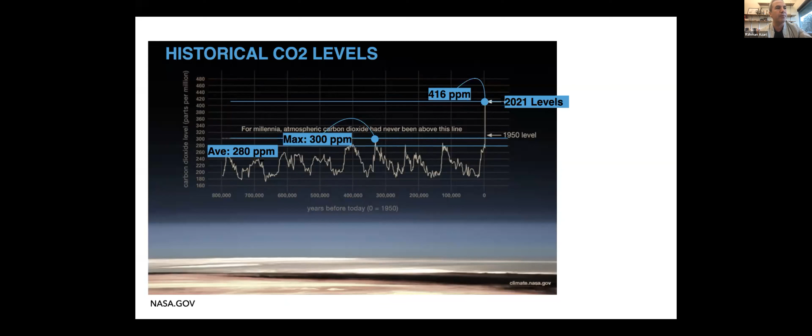I checked the NASA website last night, and their latest recording of CO2 levels is for October 2022, and that is 419 parts per million. In other words, in less than a year, 3 ppm has been added to the concentration of CO2 in the atmosphere.

Speaking about percentages, in this presentation I'm going to present an overview of energy use and greenhouse gas emission contributions in the United States and its national drivers, and some of the policies to limit global warming below 1.5 degrees Celsius. The United States is the second largest emitter of GHG emissions, with a share of 12.67% of global emissions.

The most recent data shows that the country's annual energy use is 98 quadrillion BTU, which is about 103 exajoules. 39% of total energy use in the US goes to building operation, with at least 6% going into building material manufacturing and construction. These figures include electricity use and its loss in the system.

The United States also emitted about 5.98 billion metric tons of equivalent CO2 emissions in 2021, 21% of which is caused by direct and indirect emissions related to building operation, and at least 6% of which is caused by building material manufacturing, particularly cement, steel, and aluminum.

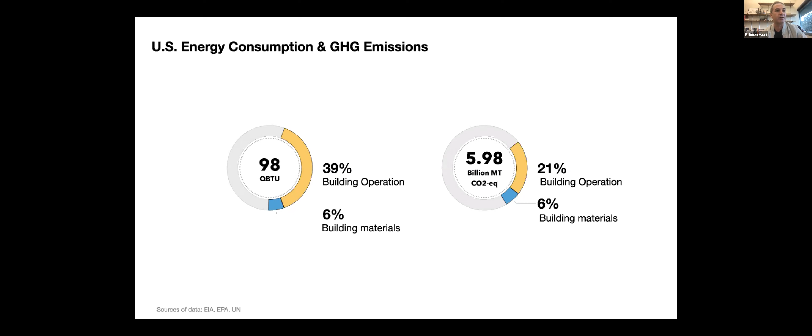In the building sector, residential is the largest consumer of energy with a share of 21%. 72% of residential energy is consumed for space heating and cooling, followed by 22% of plug loads. In the commercial sector, the share is 18% of total energy use in the US, and the energy is primarily used for heating and cooling at 40%, followed by 42% plug loads.

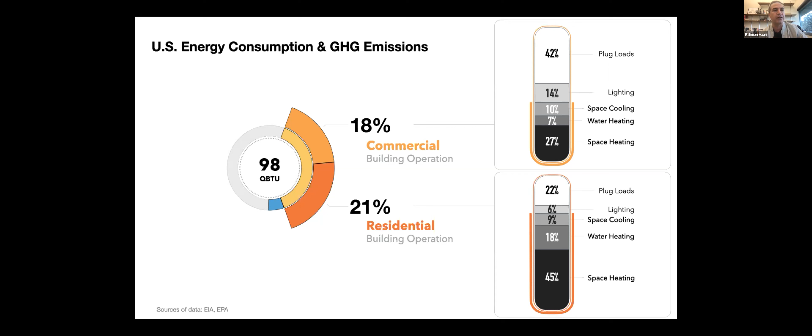The energy consumption of the residential sector is directly driven by 3 factors, including population, size of housing units, particularly floor space, and household size.

US population has increased by 12% since 2005, and 2005 was the year that we had the largest GHG emissions. Also, as more Americans tend to live alone, the household size is shrinking, leading to a 2.33 decrease in 2021, yet the average size of new housing units has increased by 1.89% compared to 2005.

Despite directions of these trends, as well as increase in the floor space of both residential and commercial floor space in the United States, both energy use and GHG emissions of the building sector have fallen in 2021 as compared with 2005, with a 3% decline in energy consumption of the residential sector and more than 2% reduction in the commercial sector. While part of this trend is certainly because of the effects of the pandemic, energy efficiency improvements, electrification, as well as decarbonization of the electricity sector have contributed to this decline.

Acknowledging the need to limit global warming to 1.5 degrees Celsius, the United States government has defined 3 targets in its effort to control its GHG emissions, including 26 to 28% reduction of emissions in 2025, 50 to 52% reduction in 2030, and achieving net zero emissions status in 2050.

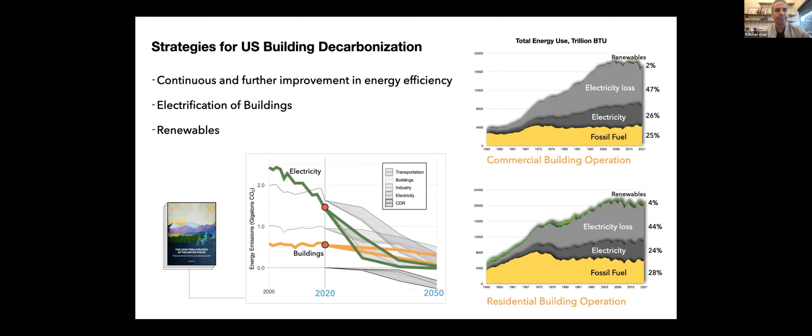The new long-term strategies of the US government also focus on reducing embodied carbon emissions. Currently, at the global scale, embodied carbon represents 28% of building emissions annually, as compared with a 72% share of direct and indirect building operational emissions. But it is estimated that building construction globally between now and 2050 would account for about 50% of building emissions. This shows the urgency to focus on embodied carbon.

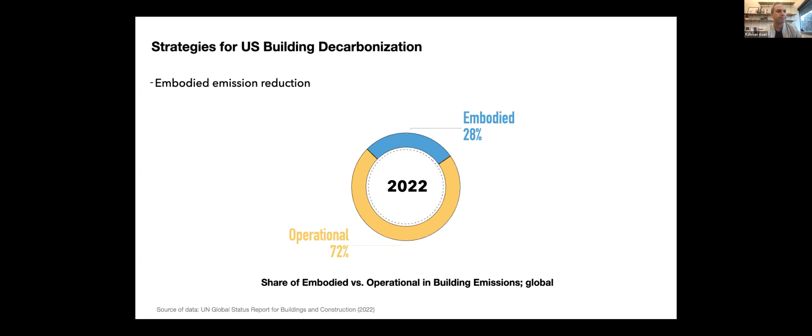The embodied carbon strategies in the United States are pursued by regulations and policies at federal, state, and local levels. At the federal level, the Federal Sustainability Plan and President Biden's Executive Order 14057 sets the target for all federal buildings to reach net zero emission status by 2045, with 40% reduction of emissions by 2030. The government also defines new standards for low embodied carbon concrete and requires all federal contractors to disclose environmental product declarations of their products and embodied carbon for materials used in new building projects.

At the state level, currently 8 states have passed laws or are in the process of establishing procurement policies that would require environmental product declarations and limiting of embodied carbon for major construction materials, in particular concrete, glass, and steel. At the local level, more than 25 cities and authorities in the United States have climate action plans with embodied carbon implications. Embodied carbon reporting and improvement are also actively pursued through green building rating systems such as LEED and Living Building Challenge.

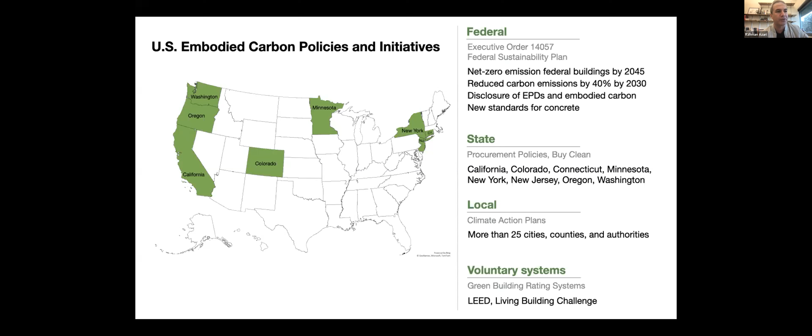An important next step perhaps would be to include mandatory embodied carbon targets and thresholds in the building codes for United States buildings.

The size and trends of the building construction industry in the United States shows both the urgency and opportunities for change. To better understand these opportunities, we have used the trends of population growth and variations in the sizes of commercial and residential stock to provide a simple estimation of new building construction by 2050 in the United States.

The existing building stock in the United States includes 24.6 billion square meters of residential floor space, 9.2 billion square meters of commercial, and 1 billion square meter of industrial building sector. We estimated that a total of 9.7 billion square meters of new building construction will be added to the existing stock by 2050. That is more than 12 times the area covered by New York City.

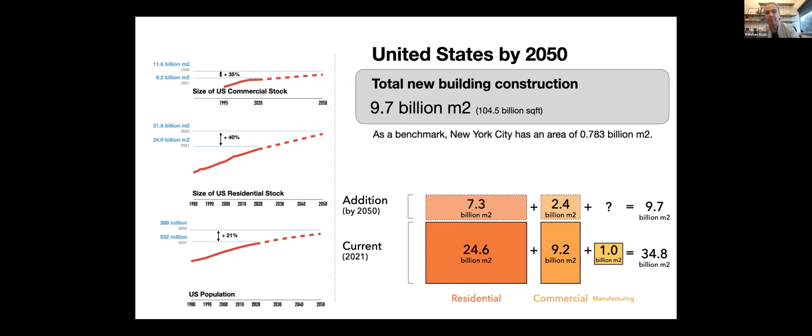A knowledge gap in the field of embodied carbon is a lack of tools to help policymakers understand the magnitude of embodied carbon implications of building construction at the scales of urban, regional, and national levels.

In a project entitled URBEC, Urban Embodied Carbon, we aim to integrate bottom-up and top-down modeling approaches to create a tool that helps understand how current and future construction practices and embodied carbon policies would affect the United States goals to achieve net zero emission status by 2050.

In that direction, we are developing frameworks and models to quantify, assess, and predict embodied carbon at regional and national levels under different scenarios of growth, densification, and decarbonization policies.

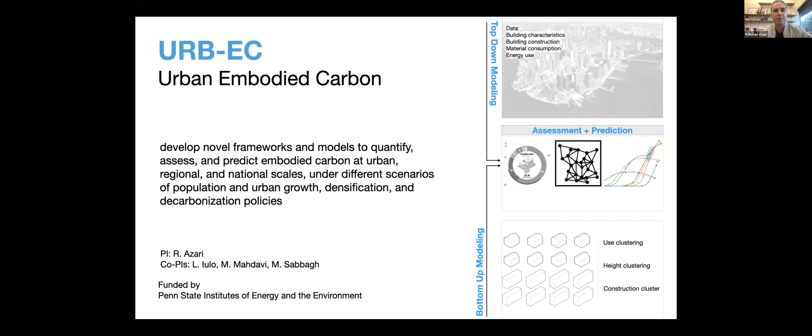In the first phase of this project, we focus on estimation of embodied carbon of residential building construction at the national scale by 2050. We used clustering analysis and identified the share of different archetypes of residential buildings in the US construction industry based on the type of building, structural materials used, and the main cladding materials.

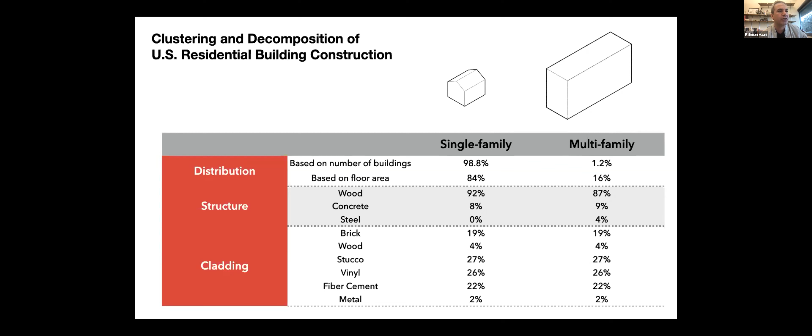As an example, the existing data shows us that new single-family housing in the United States has a 98.8% share in the residential construction market based on the number of buildings, and a share of 84% based on the floor area. Wood framing represents 92% of single-family housing construction, and concrete framing represents 8%.

We used the results to create 30 combinations of building design that would represent the residential construction in the US and determined the share of each combination in the total market. For example, the share of single-family housing units with wood framing and brick cladding was determined to be 14.6% of the entire new housing construction market in the United States.

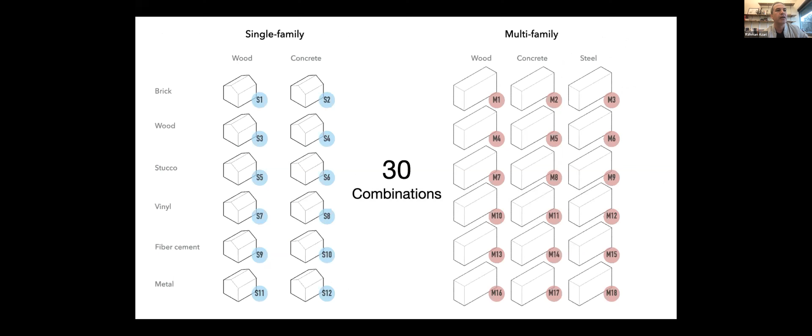In the next stage, we used drawings and bills of materials for two actual projects to create BOM for 30 combinations and used Athena Impact Estimator. This is a tool used primarily for the North American construction market to model the embodied carbon and life cycle environmental impacts of these 30 combinations.

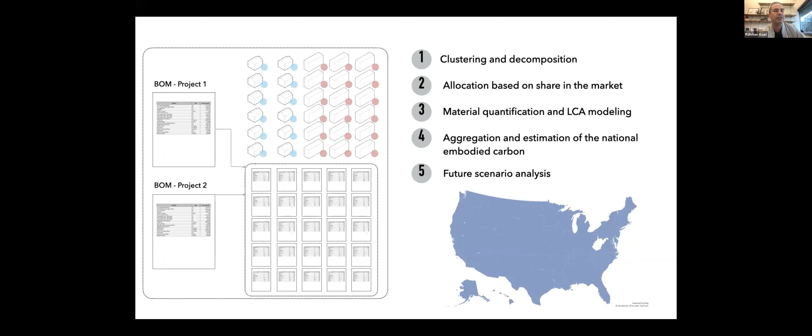We then aggregated the results to estimate the embodied carbon of the new buildings to be built by 2050, based on the projected growth in population and the projected growth in residential stock. Through this research, we were able to develop a framework to estimate the embodied carbon and life cycle environmental impacts of the building construction industry at the macro level of a country.

The results of our analysis showed that if we continue with the current growth of the housing stock, basically 2.7 billion square meters of housing is added every year to the US construction market. With the current growth that has been going on for the past decades, probably we can't achieve the new targets of net zero emission status by 2050.

The contribution of our work is primarily a framework to estimate the embodied carbon at larger scales beyond buildings. The advantage of this method is also that it isolates the effects of different archetypes of building construction on GHG emissions of the construction industry based on type and share in the market. The results also help understand the effects of embodied carbon policies on controlling US GHG emissions.

In the next step of our research, we are accounting for the trade-offs between operational and embodied carbon. We are adjusting the model for regional sensitivity. We are trying to provide further clustering in order to classify buildings based on more parameters, but of course the availability of data is a challenge for us. We are trying to adjust this model to also work for commercial buildings of different types to be included.

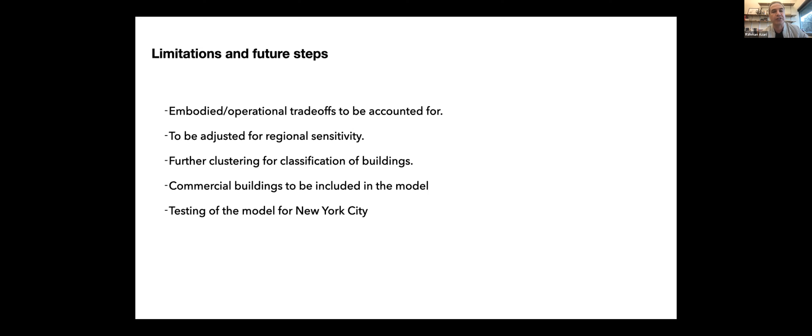So that concludes my presentation, and I would be happy to answer any questions that you might have.

Could I ask if there are any questions? I can't see any in the Q&A. Sorry, Ming, you have one.

You say, can you talk a little more about what rates, attributes and parameters you use to estimate the building stock growth till 2050? Do all states and jurisdictions have the same growth rate? Are those all new construction or also major renovations?

So we used the American Housing Survey data as well as the US Census Bureau data, which shows the steady growth, pretty much in the past few decades. There has been a steady growth of the residential housing market. There is some research, a famous paper published that shows 120 years of the housing market and how it has changed in the United States. So we used some of the assumptions based on that article as well, and use that to project the growth by 2050, assuming basically a linear growth by 2050.

Brilliant, thank you very much.

I can't see any other questions in the Q&A, but I have a number myself, Rahman, which I won't attack you with just now. But I was particularly interested to see the high percentage of single family buildings in your residential buildings, and that's obviously very different to most of Europe. I wonder if your modelling suggests that providing more multi-family buildings would be a lower embodied carbon solution.

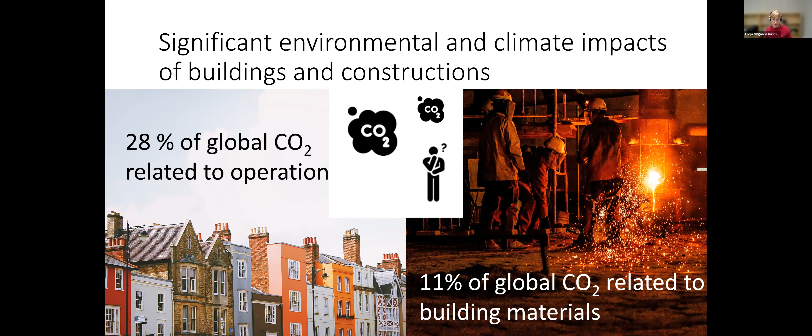Now this has been on the mind for policymakers in the Nordic regions for a while now, and recently they have taken it up a notch by really having this whole focus moving from a voluntary exercise by the industry stakeholders to a mandatory exercise. Because in the Nordic region there's been several green building certification schemes in use, and the industry has gradually moved into using these sustainability assessment schemes as a way of promoting their buildings and building up competencies within the area.

But the authorities in the Nordic regions have also taken it up a notch by moving from the operational perspective to including embodied emissions and also whole life carbon emissions. So it's not just focused on the emissions associated with the operational, but also the embodied. And that's also a step for the industry, of course.

Some of the external drivers for this development that we've had here is partly because of the industry gaining more and more experience with it and having input from a growing research field within the area.

It's also the national or regional regulation that we find from an EU perspective. So, sorry about the abbreviations here for non-Europeans, but we have the Energy Performance of Buildings Directive, which makes every country in Europe consider the energy, the operational energy use in buildings. And now it's also lining up for the inclusion of whole life carbon calculations, documentations, as within a few years that will be part of the EPBD.

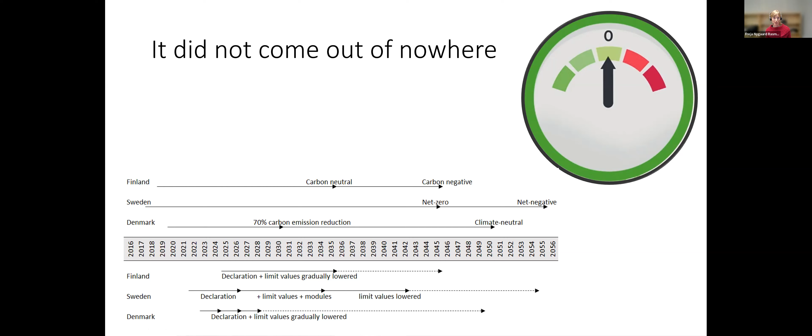Just as an example of what it is to be on the research side of it, from my Danish perspective, this is sort of the symbiosis we've had until recently in establishing life cycle assessment-based methods for evaluating buildings. We've also produced freely accessible tools that the building industry could use and obtain new knowledge. And then they would ask for product data that we could again feed into refining the method. And we would have such a nice cycle around, and we would publish some reports and some papers.

But then when the politicians came onto this and started putting it into the regulation, we were really excited from the research side, of course, but it also really fired up the demand for all the other things we have here in this circle of LCA life. So all of a sudden there was a growing demand for product data. There was an increasing pressure on the credibility of the method.

Can you prove that it is like that? What about the scenarios that you introduce? Like much more focus on the credibility, perhaps not surprisingly.

And then the introduction of limit values also really put pressure on the way that we handle the data and the method, because when we deal with limit values, in Denmark, they put limit values for 12 kilograms of CO2 equivalent per square meter per year.

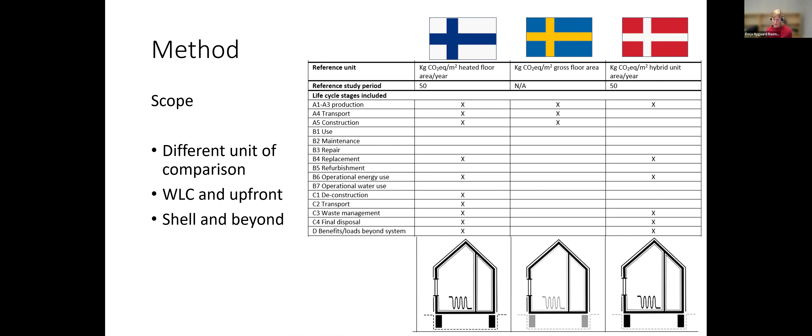But what all of these regulations have in common is that it's the plan they will develop further each time they are updated.

A few words about the data that has been used - and when I say data, I mean the carbon intensity of products that practitioners use to make the LCA of their buildings. We have the EN standard regulating documentation requirements for environmental product declarations for construction products, and based on these we have EPDs for specific products or producers, or from industry associations, giving an industry average of a product.

That's quite specific to whoever paid for the study or publishes it. But when we include it in the regulation in the Nordic countries, we've also had to provide some generic data that practitioners can go to as a representative product. If they don't know which specific product goes in the building, they should use the generic data. And of course it's a big question what the representative product should be - what is the typical market brick, for instance? So there's a lot of debate about that.

In all three countries, the regulation lets you either use the generic data, or if you know which type of product you have in the building, use the available EPD. The Finnish and Swedish authorities developed their own generic data, and the Danish building industry has been used to the German data, the Ökobaudat, for so long that it's been really hard to get out of that track.

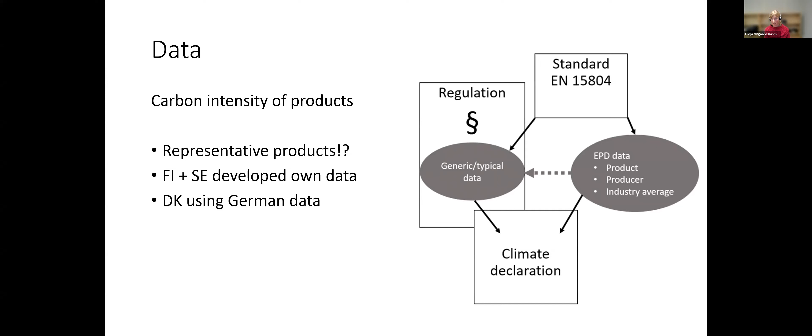It's static values for the whole life cycle of 50 years. So of course that means the Finnish and Danish frameworks are really not comparable in that sense either.

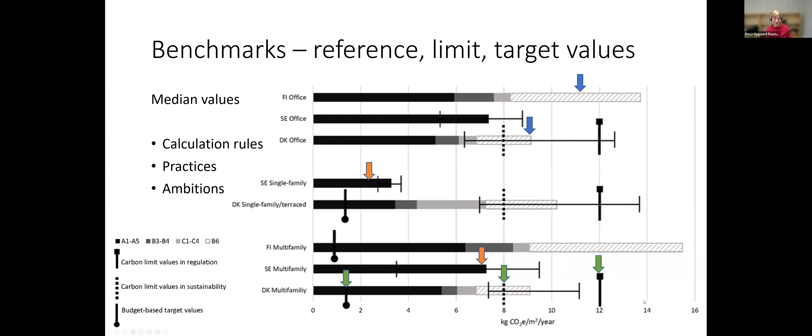A summary here: we have quite a lot of coordination going on within the Nordic countries, but still quite limited what they have actually achieved in harmonizing, all with good reasons. So no harm in that.

As I mentioned, there are some specific challenges when introducing the limit values. Everything has to be airtight for the number of years that this regulation is in place until it's updated. This configuration of the method, the data, and the benchmarks really should be airtight and cannot be readily compared with other countries' benchmarks, of course.

Then in all three countries there will be updates concerning method, concerning process, and also concerning benchmarks, because of course we would need to readjust the benchmark values as soon as we have a readjusted method.

And then as we saw, there is a big gap from the current limit values and onto some budget-based values where we take the access point in sort of allowance per user. So preferably, alongside this per square meter action that the regulatory framework is now driving, we should also have some demand side reductions on a personal level somehow.

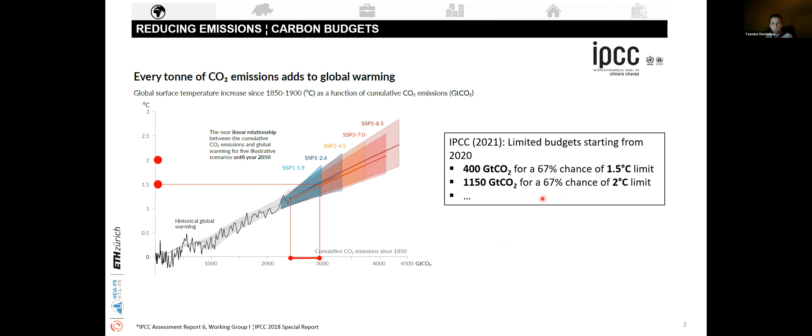The IPCC quantified these so-called global carbon budgets in their latest report with different levels of uncertainty. Here I've reported two: for 1.5 degrees or 2 degrees, with a 67% chance of achieving the goal. The question of the research I'm presenting today is how can the built environment understand and align to this global carbon budget?

To try to understand this problem, we used a top-down approach, answering intermediate questions to finally understand how and which strategies can help the built environment reduce emissions and contribute to limiting global warming.

First, national emissions. In this case I use Switzerland as an example, but I believe the methodology can be applied to any country. The emissions at national level are examined first to better understand the starting point and which dynamics a carbon budget and its distribution should account for.

Then the principles of allocating a global carbon budget to the national level are evaluated and discussed. Then we try to further allocate budgets to lower territorial scales, and we try to understand the limits and hypotheses behind doing such an allocation.

Then we took the Swiss carbon budget again and allocated it to sectors. There we tried to understand how future capabilities of each sector play a role in this carbon budget allocation. And we finally reached the built environment.

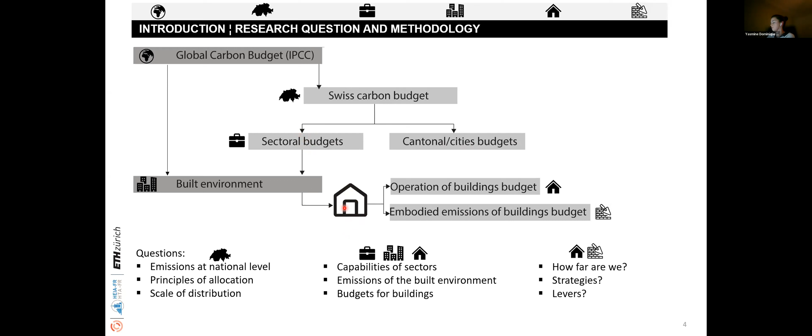Looking at national emissions, it's important to mention that emissions reported internationally, valid for any country, are based on the territorial concept, meaning only emissions occurring inside, in this case, Swiss borders, are accounted for. This is the so-called production-based accounting.

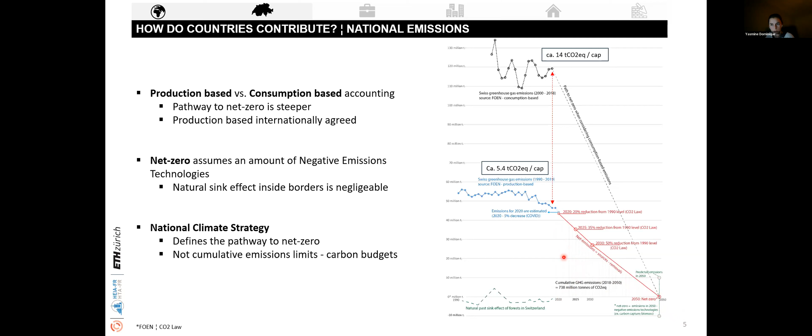Then how do we translate a global carbon budget to Switzerland? This, of course, raises difficult questions about how best to share these carbon budgets amongst nations in a way that respects the need of reducing emissions globally, but also addresses disparities amongst nations with respect especially to historical emissions, but also to their potential future emissions.

In the literature, this question is debated from different angles and opinions, but 4 main concepts are usually discussed: responsibility, capability, equality, and sovereignty. A fair distribution should include all of them, and a balance of environmental effectiveness, equity, national capacity, political feasibility, economic efficiency, and technical requirements should be met.

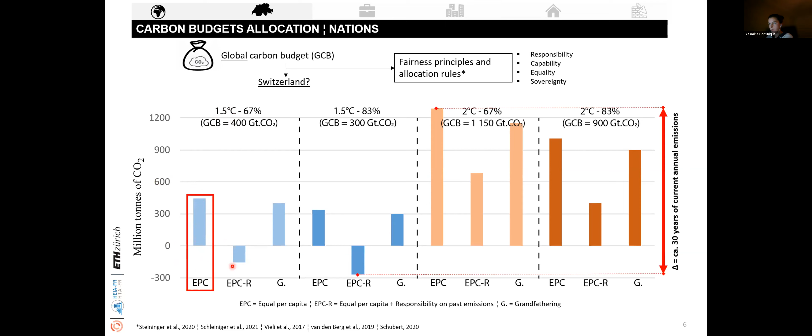The same concept of allocation can be further taken to lower territorial scales, applying the same allocation rules. This can be a useful tool for policymakers to set targets and understand viable strategies based on regional or communal differences and situations.

But this will also increase uncertainties about these limited budgets and questions about the viability of reducing the scale of analysis. First, the data is less available at lower scales. Second, the disparity between direct and indirect emissions—what is actually emitted inside the borders of the scale you're examining versus what is imported—becomes far more relevant if you lower the scale.

Last but not least, the concept of a carbon balance between sources and sinks is not really consistent if you lower the scale. For all these reasons, we concluded that reducing the scale to distribute this budget wasn't appropriate for the goal of this research, so we decided to stick to the national level.

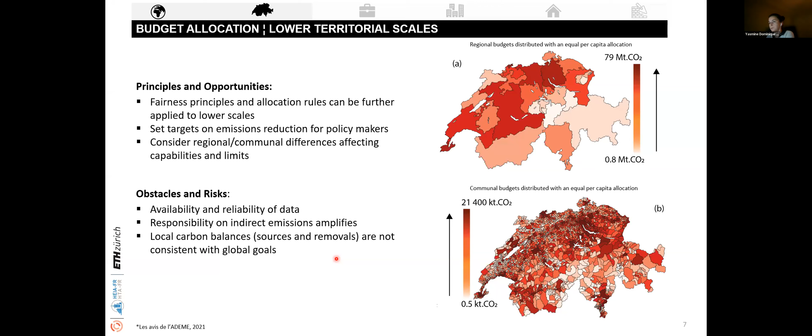For example, the sector called 'others,' from the official report of emissions in Switzerland, includes agriculture and waste management processes. It doesn't currently hold a high share of emissions, but is estimated that it will not be able to reduce emissions as fast, so it gets a higher percentage of the budget because we account for the fact that it will not reduce emissions as much.

The same happens for the industry sector, at a different level, which is also not expected to completely eradicate emissions in the time frame until 2050, and thus gets a higher percentage of the budget compared to the other sectors.

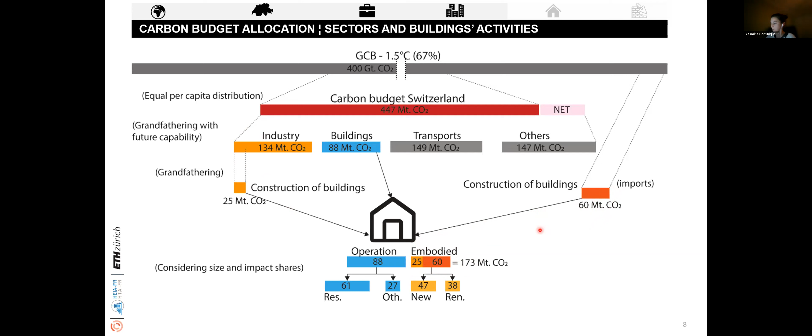So how far are we in achieving this budget? If we consider the building stock and practices to continue as today, we are currently at a 1% renovation rate, and we assume we will follow the current recommendations, which are not a norm in Switzerland but technical recommendations on operational and embodied emissions for buildings.

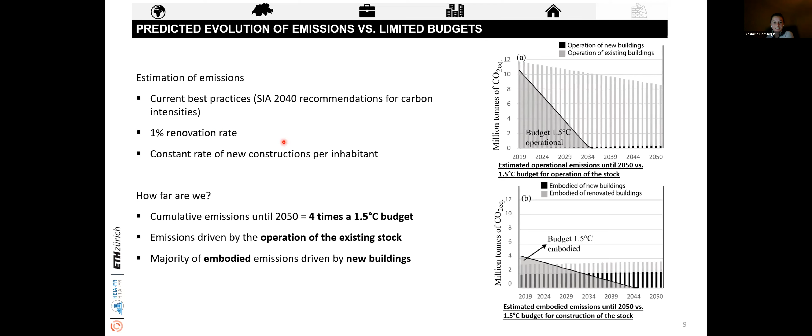Then how could we achieve our goal? That's the other question. I want to point out there is of course not one way of doing it, but the end result is very dependent on many factors affecting emissions in the built environment. Here I present one scenario where we assume the operation of the building stock will comply with its budget, reaching absolute zero linearly in 2035.

This translates to decarbonizing existing buildings at a rate of 6% per year from now on. Then embodied emissions will follow a decreasing pathway in line with the budget, resulting, if we look at emissions per square meter, in 90% less emissions per square meter in 2050.

If we consider that buildings designed today will probably be built in 5, 7, or even 10 years, or at least this is the case in Switzerland, we realize we should plan today's buildings with already 50% less emissions than the current average to meet the target by 2030 when the building is actually built.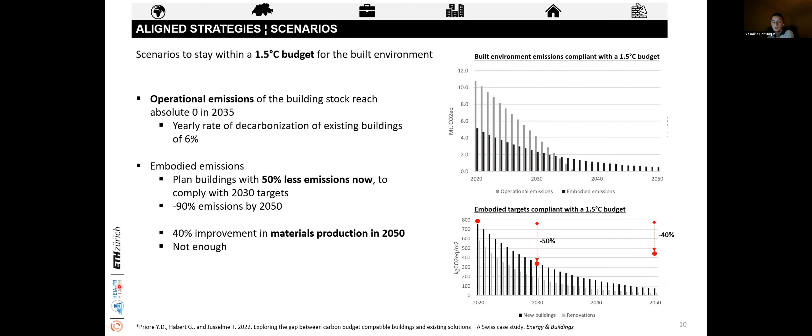As I said, there is no one way of meeting the budget. Here I want to point out that if we do not achieve the big assumption I made in the previous scenario of reaching zero in the operation of the building stock by 2035, the embodied emissions or budget will have to actually be negative, in a way compensating for the excess emissions that will be emitted.

To end on a colorful note, we created a little interactive parallel coordinate graph that we presented at a conference this year, where we put basically the main levers: the goal year of implementation, the operational targets, the embodied targets, and the renovation rate. With this tool, one can set or lock all the parameters and check how much emission will be spent till 2050, then compare it to a limited carbon budget.

Maybe I'll just accelerate, I think I'm running late. I just took two screenshots.

It's a very useful tool to understand the dynamics of changing these parameters at building stock level. One clear example is the two graphs here underneath.

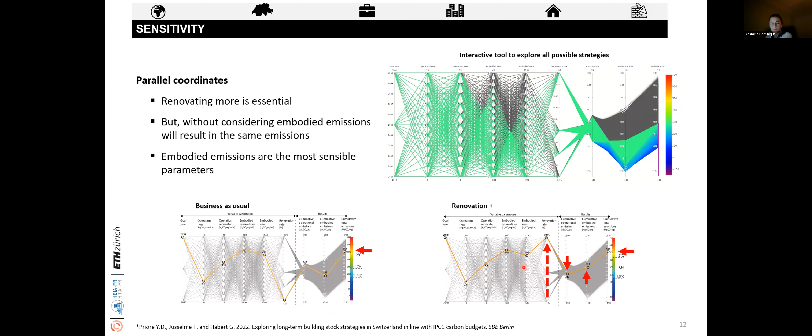By just changing the renovation rate and increasing it, but without looking at embodied emissions, we actually emit the same amount of cumulative emissions till 2050, giving a clear message that just renovating more without looking at embodied emissions will not solve the problem.

In conclusion, defining limited caps on emissions, such as carbon budgets, can be very useful to identify strategies for the whole building stock, but we have to remember the high variability that such budgets have in their background, depending on the allocation rules as well as the starting hypothesis.

In the scenarios I presented today, it is clear that if we don't change anything, we'll have no chance to meet a 1.5 degree budget. But also, given the very hard task to eradicate operational emissions, negative contributions from the building stock must or could be evaluated.

Finally, increasing renovation rate is indeed essential, but only if coupled with very low, or if not negative, embodied emissions of such renovations. Thank you, sorry, maybe I took a little bit more.

Yes, that was fine. We are running very slightly late, but it's pretty good. I thought that was really interesting.

Thank you so much. We have one question in the Q&A from an attendee who says, does the difference between production-based carbon and consumption-based carbon entail the consumption or lifestyle changes are necessary for actually reducing the carbon?

Do they suggest? I think it means that lifestyle changes are necessary. I think that's a good question. Very good question. Of course, I would say lifestyle would change both consumption and production-based emissions, actually.

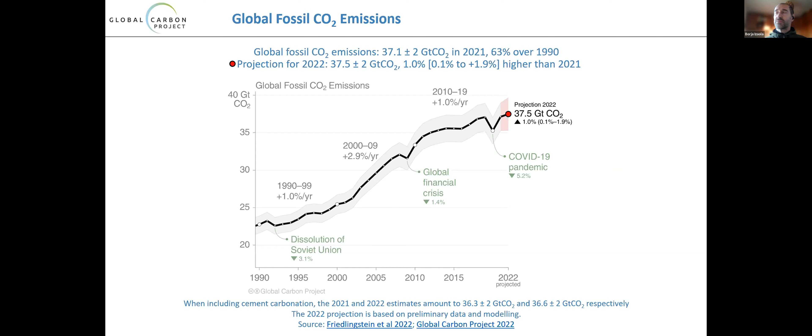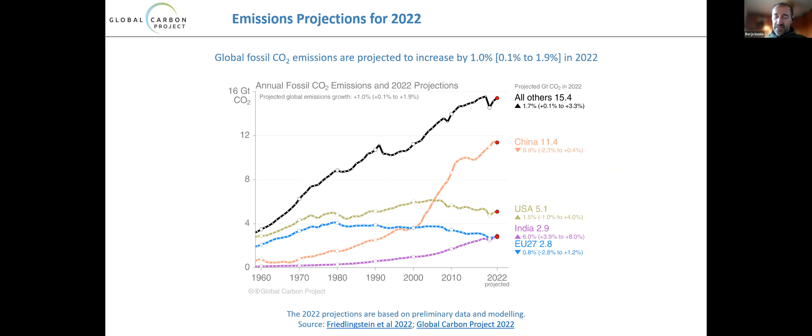Briefly, who's GBC, who are the Green Building Councils, is part of a global network of associations, including all actors of the building sector in each country.

Like in the Spanish case, well these are not the most updated figures, but anyway, about 400 associated members, more than 10 European funded projects, and many agreements with many entities. We run our own certification scheme with over 3 million square meters certified. We have a lot of events, and we also run a material platform where we suggest, recommend, and give data on several building materials.

We have run this project which helped roll out, get to know, and improve the Levels framework. The Levels framework is a voluntary framework. Freya mentioned that in her presentation before, about how to report, how to measure, how to understand sustainability of buildings. There are many countries in Europe, many understandings, not just among groups of countries that other countries consider very similar, like the Nordic countries.

Of course, for other Nordic people, there is a difference between Denmark, Finland, Norway, Sweden, and so on. It is brief, meaning that it comprises 16 indicators, but they are very powerful indicators. It's called levels because the approach is by level, by entry level. You can apply the levels framework with just your concept design, or you can already have the executive design, with all the details, and assess more profoundly. Or you might have already built the project and have real figures and be monitoring the performance of the building. You can also apply the levels framework at that very deep level.

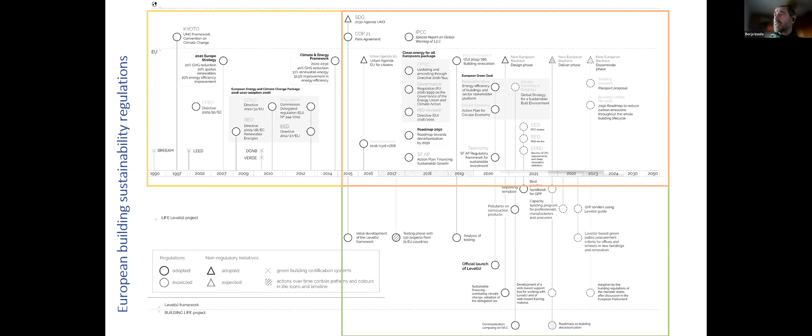I will go a bit more into detail in parts. First, until 2014, when basically the levels framework was thought to come to life, then until now, and then more in detail what this Life Levels project has been helping with in terms of advocacy and quality of data and methodology.

Definitely the Kyoto framework and the Paris Agreement and those big figures, those big targets, which have been increasing in Europe. Some years ago, we were supposed to achieve a reduction in global warming potential of 40%; after the Fit for 55 program or package, we have to reduce up to 55%.

We had the very relevant EPBD, Energy Performance of Buildings Directive, which has gone through several updates. In the very last update, it is currently at the Council of Europe to be finally approved. The suggestions were more ambitious than the directive will finally be, and for that, the energy ministers of the European countries thought it would not be realistic to apply some of the suggestions that had been proposed before. And there are many other directives and proposals on renewable energies and so on.

In 2014-2015, the levels framework started when circular economy principles and more profound debate internationally and at European level started, and when all lights went red concerning the climate emergency. So the idea was that Europe would be leading the world in terms of reducing carbon emissions and other climate actions. At times, wording goes faster than facts, but a few things have happened.

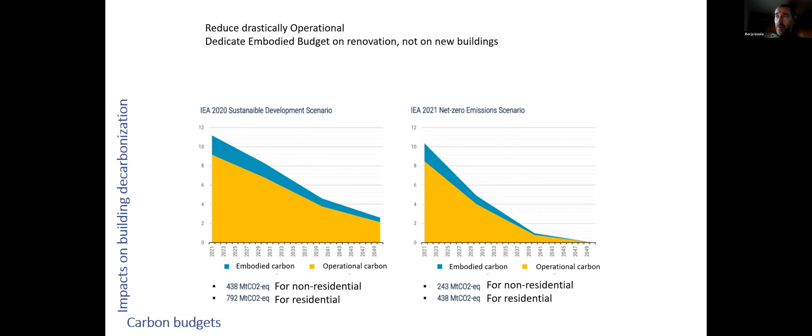We did something similar to the methodology Yasmin showed before. What we went into detail on is what needs to be done by the building sector—manufacturers, public administrations, designers, prescriptors, developers, regulations, everything—if we aim at achieving net zero, or as close as feasible.

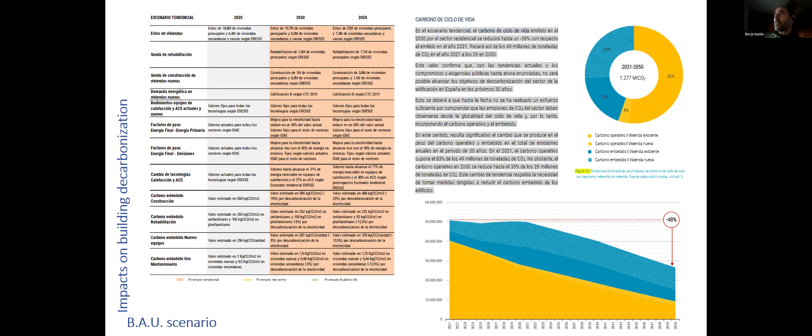So this is the business as usual scenario. We reduce, but we are still very far from net zero in 2050. We studied another scenario which develops from the best practices of the building sector, and it is more ambitious. It reduces more, 61%, but it's still very far from the expectations.

And this is the best practices scenario. Of course, best practices are in the hands of very few pioneers and actors who are very committed to decarbonization and environmental issues or sustainability.

Briefly, it intends to reduce embodied carbon to 25%. It also aims at increasing rehabilitation, basically doubling what is planned, and choosing materials with lower carbon. Without going into much detail, what you see in pink represents the best strategies in Spain, should they be implemented.

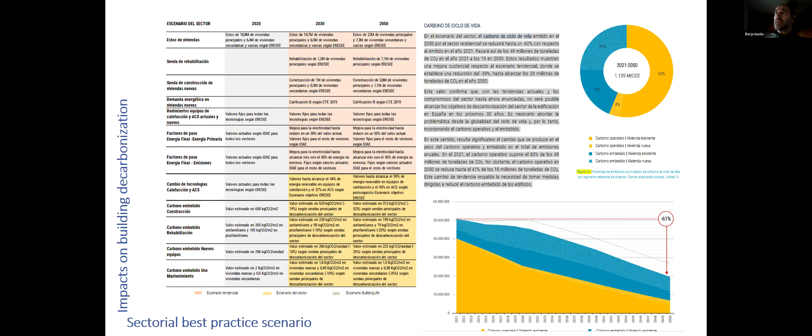What we did was propose a scenario to achieve, if not net zero, something very close—passed through a filter of what the actors thought feasible. We had many meetings and roundtables with over 230 different agencies and more than 900 people to check if they thought this was achievable. That's where we stopped.

If people do not see it as possible, then what are we talking about? They are not going to do it. Even so, this scenario means reducing the Spanish national plans for new buildings until 2050 to about half of current plans.

And increasing the rate of rehabilitation, basically multiplying by 10 times what is being refurbished nowadays. We aim at achieving the best energy certification for all buildings, rehabilitated and new, and improving the efficiency of all equipment by 67% and 98%—almost 100% concerning heating.

We also reduce embedded carbon in the main building materials to 30%, up to 75% reduction for pioneering cases. This means the footprint or benchmark for buildings in 2030 would be 186 kg of CO2 per square meter in single family houses, 74 in multifamily houses, and in 2050, 66 kg and 26 kg for multifamily buildings.

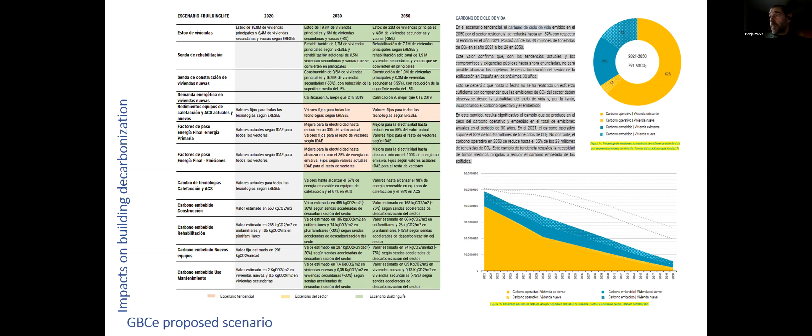So the ambition of this is so extreme, so disruptive, that although those attending our meetings—who are already the pioneers and most motivated—thought we are really touching what is considered impossible. Even then, we do not reach net zero.

And this is the comparison of all that. Basically, what we have done corresponds to a 2 degree warming scenario in 2050, not even talking about a 1.5 degree reduction.

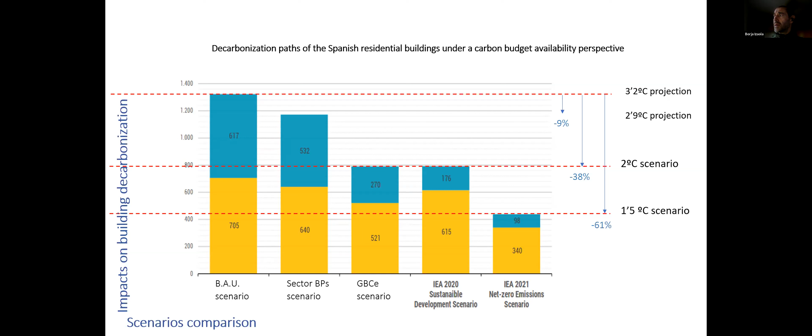Some conclusions to finish. Carbon advocacy is possible, even from small groups like the Green Building Councils—we are only about 20 people working here, so we are not a big company. Although we still represent 400 agents, which is less than one thousandth of the entities in the sector in Spain.

But policies help only if they are realistic and feasible. If not, they can actually block action. This happened before—I think it was Freya who mentioned the European taxonomy. In Spain, some of the targets of the taxonomy are just impossible. So how will we do it? How can we accomplish and respect regulations if they are not realistic?

What needs to be done? Europe is actively reducing its carbon footprint. Of course, there is no NATO war on our borders, there is no big oil in the world, and there is no migration from any southern country into Europe. So we are really doing well.

As Alice, you are laughing too much.

As you mentioned before, independent, transparent and credible data and use of this data are needed to know, compare, and draw conclusions, and hopefully eventually become baselines and benchmarks included into policies that help accelerate these processes. The levels framework is proving useful to support this transition to sustainable and decarbonized buildings, and I do believe so. When I've given information on the levels framework, attending or responding to people asking for consultancy, it works. I think it works.

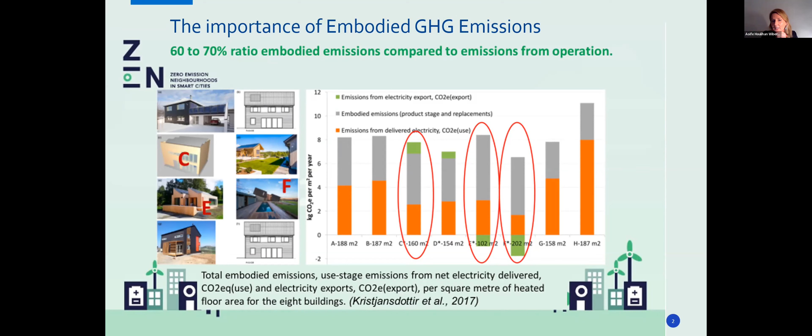What I'm presenting in the chapter is the results and output from Subtask 4 in Annex 57. This research was conducted almost 10 years ago, but it's still very relevant. The purpose of the case studies was to create a collection whereby we could collect case studies from around the world and extract and analyze the data from 80 of these case studies.

We had three main purposes. One was to produce a body of different international case study typologies, and make the building and LCA data easily accessible, transparent, and identifiable. So we published these results in a case study collection report.

Secondly, we wanted to use the international case studies to extract and analyze this data so we could do comparative analysis for specific methodological and design aspects, and we've published this in another ST4 report. Finally, we wanted to use these case studies to develop guidelines, which is the focus of this chapter, to reduce embodied emissions and increase knowledge transfer to the industry. This is published in a simplified guideline for designers.

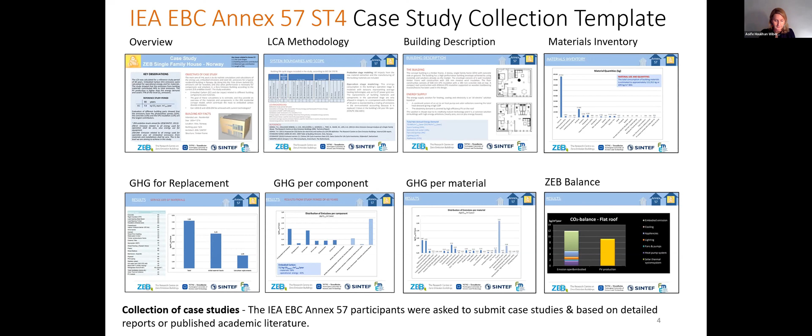From this case study information, we were able to develop a methodological process, developed according to EN 15978, to analyze the different themes. Secondly, and this is the focus of the chapter, we were able to identify the design and construction strategies to reduce embodied emissions.

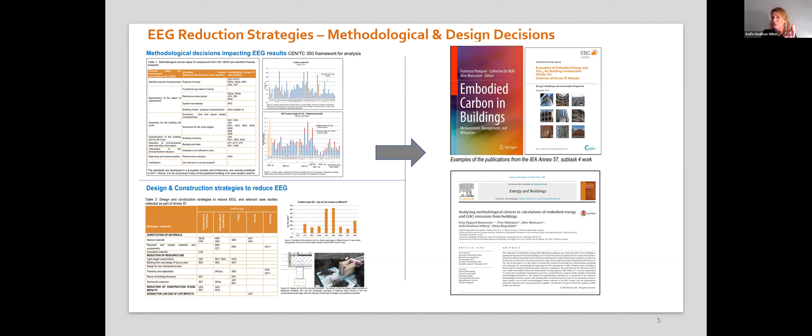So the findings from this research were then published in different formats. It was obviously in the technical reports from the annex, but also featured in Alice's book, which she edited, and other journal publications.

We were also very concerned with making the data accessible and making sure everything was transparent, so we developed a case study code for all the case studies we developed. That meant you could always trace back to the original case study and the original template. This helped us organize the information, develop the different themes, and ensure we had the transparency that was crucial to our research.

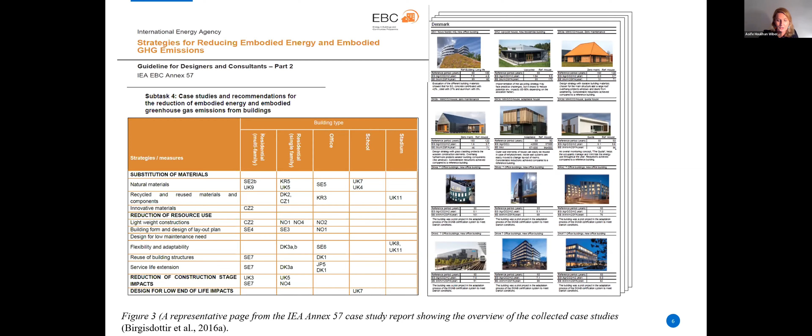A very big concern was that, as I said before, a lot of practitioners and architects aren't going to read these detailed technical reports. So how could we facilitate this transfer to industry, and how could we make the knowledge more accessible for designers in the early design phase?

One of the outputs from our annex was to develop a more visual approach in the form of a design guideline, aimed specifically at designers and consultants. We created very simple illustrations, as you can see on the right-hand side, and started to identify those key strategies that work to reduce emissions. As you can see at the bottom, we always included reference to the original case study.

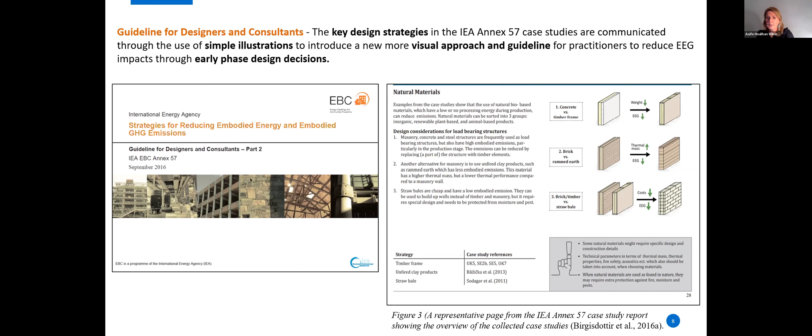I just need to move everybody over because I can't see.

This is a more detailed table where we started to identify different strategies that worked. From the case studies, we could see four strategies that really resulted in reduced emissions: firstly, substitution of materials; secondly, reduction of resource use; thirdly, reduction of construction stage impacts; and reduction of end-of-life impacts. In the subsequent slides I'll highlight a few of these in more detail.

For example, in terms of substituting materials for load-bearing structures, switching from concrete, steel, and masonry to timber reduced the weight of the load-bearing construction, and this also helped reduce the associated embodied emissions. As you can see on the left, we found some key results for switching from concrete, steel, and masonry to timber.

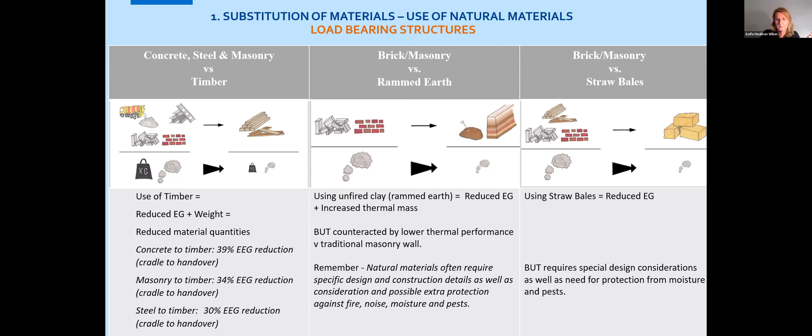For non-load bearing structures, we found that insulation was a very important material to look at because of the large parts of the thermal envelope made of insulation. This has quite a large potential for reducing emissions, particularly if you switch from mineral wool to wood wool or wood fiber insulation.

Another strategy we uncovered was that it's a good approach to switch from aluminium curtain walling to timber curtain walling, because the aluminium curtain walling is made of metal, which can have a shorter lifespan and high material processing. So switching to timber was a very good strategy.

This is something that was also used in the Norwegian ZEB pilots, which I can go on to later, where we used a Japanese technique to char and seal the outside of the wood cladding.

Finally, switching from cement to clay—replacing cement-based plasters with clay plaster—was a simple way to reduce emissions. Another benefit is that clay is locally sourced and it helped to balance humidity indoors. But again, you have to be aware that there may be impacts to consider in terms of durability and lifespan of the clay.

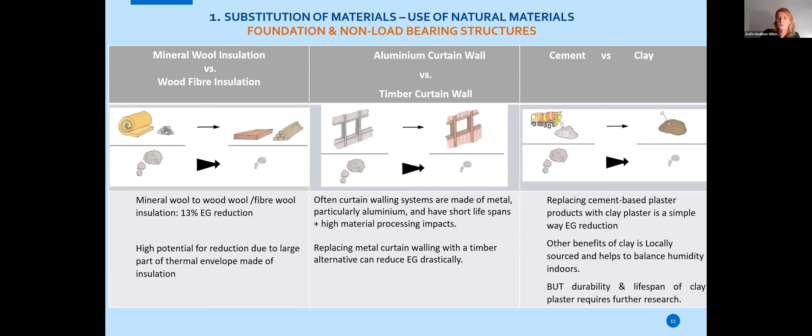In terms of reuse and recycling of materials, we identified three strategies. One was the recycling of brick, which obviously has a beneficial impact since you're not using new materials, so you're saving emissions. But we actually found that the reductions were quite negligible, at least in the cradle to gate stage, particularly because the materials often needed additional virgin materials to be added to give the material more strength.

You would need to pay attention to transport emissions and where the source of the recycled brick was coming from. In terms of upcycling waste, emissions reductions were quite considerable, but you had to pay attention to the quality of the waste materials, their structural integrity, and the availability of this material from recycling facilities.

When you come to recycling of concrete, again like brick, it's favorable because you're using less new materials. But you need to pay attention to the virgin materials that need to be added to the concrete. If it's to be reused, you need to consider the amount of energy needed to crush the concrete, and even if you use greener concrete, you need to pay attention to the fly ash that's used.

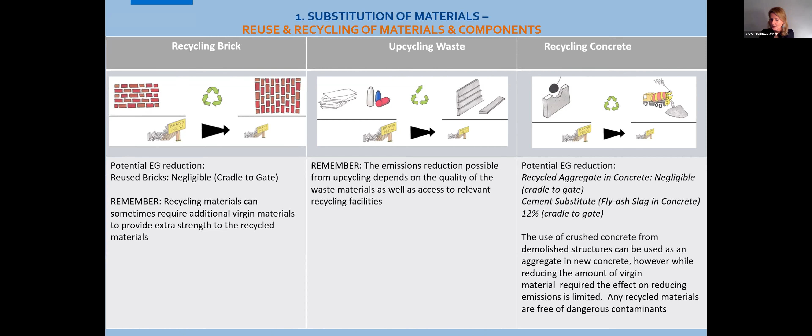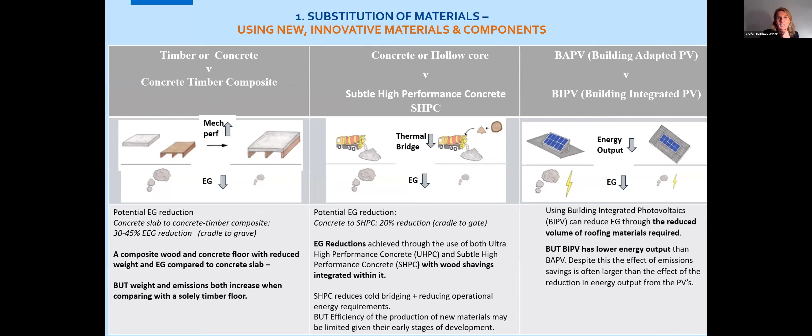I don't know how I'm doing time-wise, but am I okay? You've not got a great deal of time left, Aoife. Yeah, okay, well I probably won't get through all the strategies, and I think I'll just move on, but they're all here so we can look at those afterwards. I'll just finish up really.

There's so much importance in really taking our research, even where we are today, and looking at how we can visually communicate this in a way that's more accessible to practitioners, because they are the ones really looking to us for developing guidelines, offering advice on their design strategies to reduce emissions.

What I've shown in the presentation today is that we have identified a lot of key design strategies, but we need to make clear what those interconnections are, and communicate that in a very clear and accessible way to building designers, so they can optimize and prioritize key design decisions that will actually reduce emissions.

The first thing would be to be aware of this high interconnection — that just switching from steel to timber isn't as simple as that. You need to be aware of those positive and negative impacts.